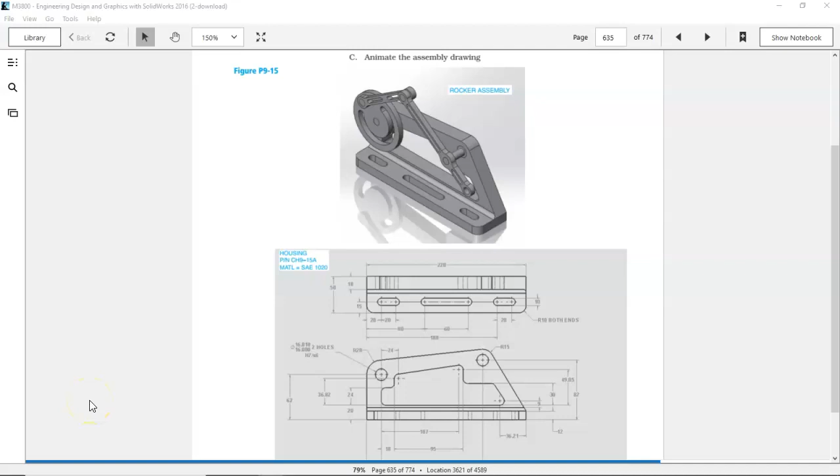This is a try it yourself exercise assignment final, and I want you to be able to go through the process in the overview. I will give you hints, but the follow along will be after the semester is over.

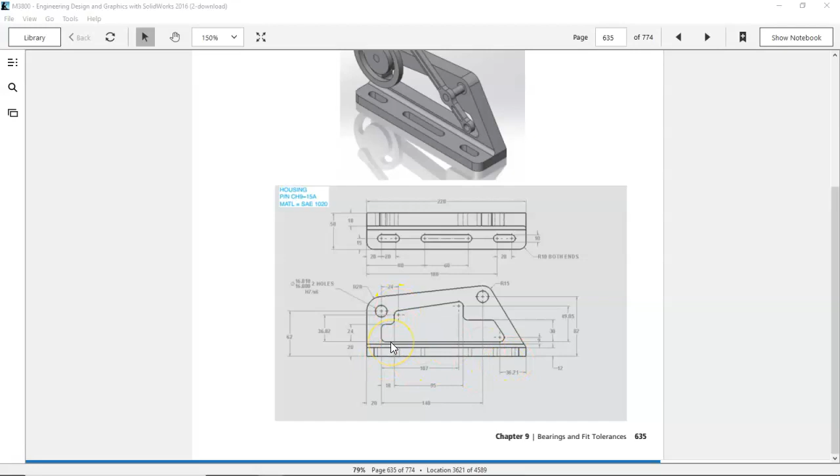So, in looking at this geometry, it really doesn't matter if you start with this lower kind of shape and then build up, or start with this back shape, front to back shape, and then build the lower. So when I look at this, let's see if we can zoom that up just a little bit.

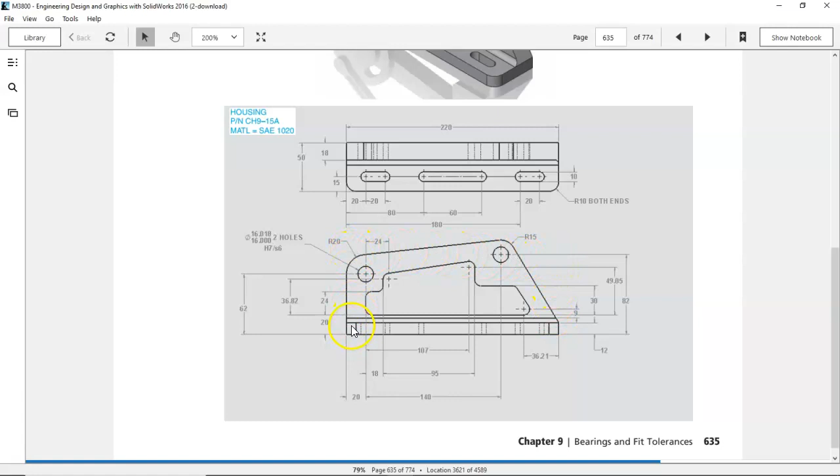When I look at this, the bottom sketches, the slots, there's nothing really too complex there. The top with the funky shape, I would probably do some construction lines, block this out, make a rectangle, do some of the construction lines.

On the next page is the geometry that they show on the interior. So, it's going to be to your advantage just to concentrate on this outside shape and worry about the interior as a second cut feature. The overall height is based on the 82 plus 15 and then getting to the 62 and making those tangent.

When you see the limit dimensions, 16.018 to 16, for a hole, the maximum material condition is going to be the smaller number. So that is the most material that's available. If we cut a little bit more, then the hole gets bigger. That's less material. So we'll take advantage of those.

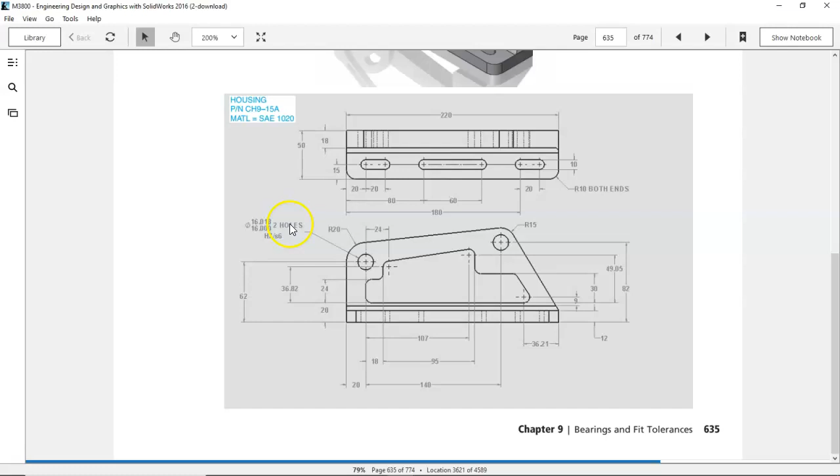And a little bit of discussion in the H7S6 is the fits for the hole and the shaft, internal and external features. So on that geometry, let's see, two holes, positions, the internal geometry, the circular.

We haven't done a circular slot, but this is a good chance to experiment with the circular slot, which is basically a center point circle that we drag out, drag through, drag the slot out, and it will generate that geometry again with the limit dimension 10 millimeters.

And the recommendation, even for going through the process and starting to think about stack ups and tolerances, because eventually those are going to become a lot more critical to our thinking and to our process: we're going to want to draw this at maximum material condition unless we talk to the machine shop, to the manufacturing engineer, to the mechanical engineer, and say, do we go to the mean? Do we go to the high side?

Typically on a CNC type situation, I don't know that I would circular interpolate that with an end mill. I would probably ream the hole, so it'd be center drill, drill, and ream. This is a steel material.

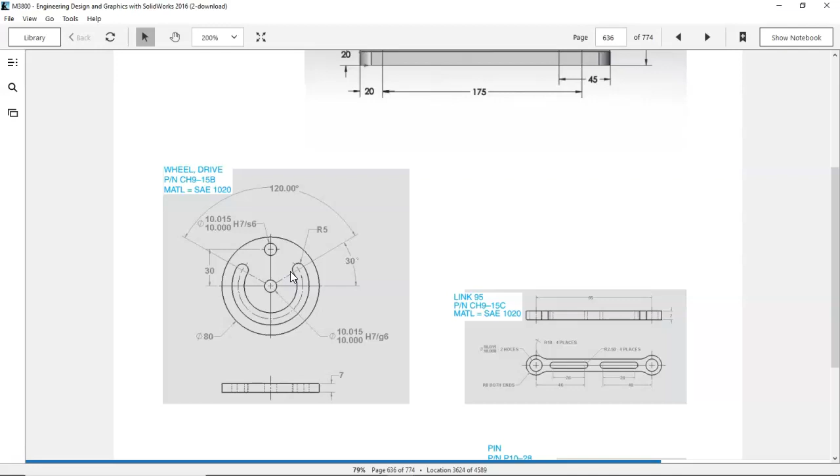We're going to look at, after the process, possibly changing some of these over to aluminum, a lighter weight alloy, and be able to utilize this as a flywheel and look at some of the mechanics using the motion functions in SolidWorks.

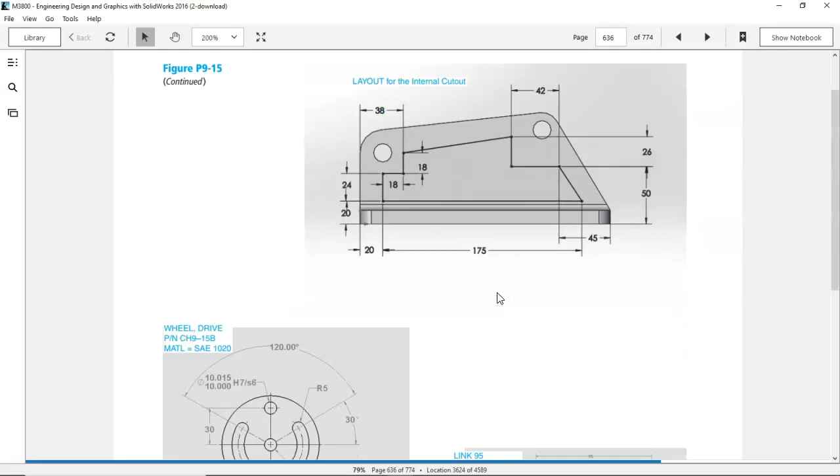Same with, well, they're calling it a link, 95 millimeter link. So a couple of slots, again, limit dimension, radiuses. We've done this geometry before, so I don't expect it to be a real challenge. You can refer back to those previous videos.

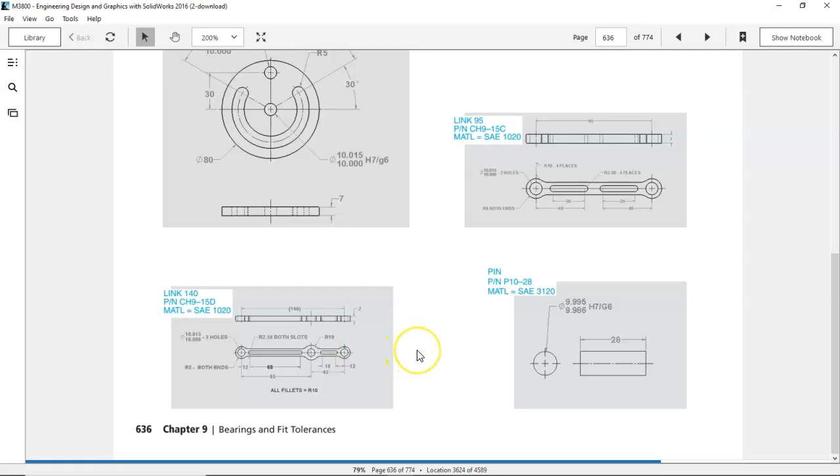There are some additional geometries that we'd want to work with. This is still just a layout sketch, going through, placing the circles, getting your geometry associated, and getting the parts built. The pin and the bushings are pretty straightforward as far as sizing.

So now we're on an external feature, and on an external feature, the maximum material condition will be the larger number, the 9.996. So 10 millimeters minus just a little bit, and you look at the stack up, 10 millimeters plus a little bit. So what we're looking for is a place where this is going to be a slip or a clearance fit and not end up in that crossover of a transitional fit or a press fit.

So these being the same types of geometry, we can use the save as. If you're comfortable with the configurations, you can go through and do the configurations. So at this point, don't worry about the H7/g6. Be able to recognize these limit maximum material conditions. And worst case, if you pick one of the numbers and put it in there, it's still going to assemble, it's still going to go. But in design review, if you have to make a justification of the sizing and the clearances, this is where it's going to become a little more critical.

So the other thing is, if we go to run a performance simulation, a Simulation Express FEA analysis on the assembly, those line to lines are a little bit easier to calculate. Telling the software that there's a gap and to recognize that gap is still in contact requires a little bit more computing power. So I start off at least line to line, and then we have other tools that we can utilize to actually work on the stack up of tolerances and critical.

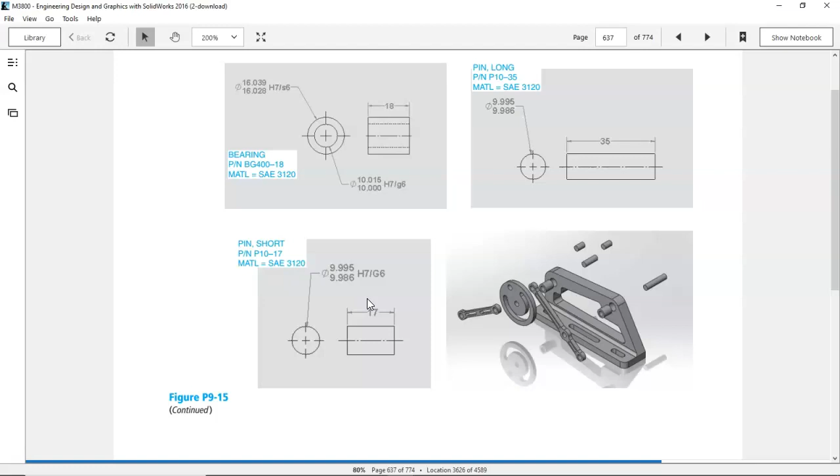So let's see, is there another page on this one, or does it jump over? So that was the end. So this is in the chapter on bearings and bushings. So there is a little bit of information. You can take a look at the McMaster website and see what a standard purchased bushing or bearing would be. And I would think that this would be a bronze. They're calling it an SAE 3120. I'm not that familiar with it, but I'm assuming that that is a steel.

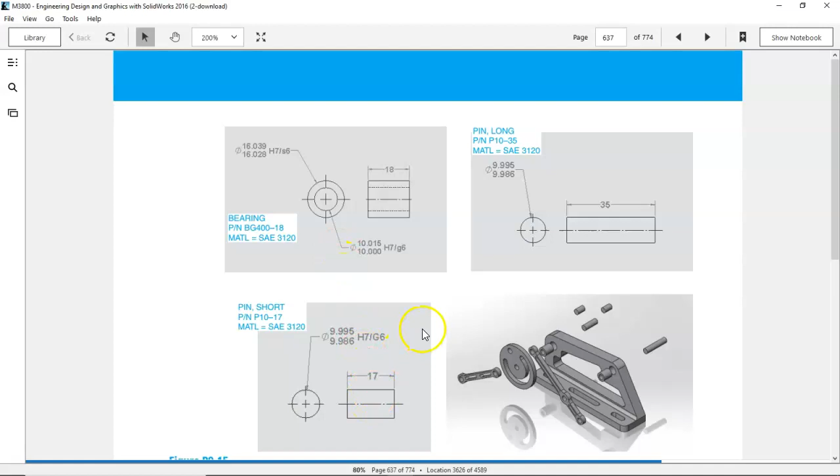In the manufacturing ease of use, I would probably look at this being an oil impregnated bronze bushing, standard off the shelf replacement parts, and then a stainless steel shaft for the pin and the long pins. So, we're going to run through the same parts, assemblies, drawings. We'll pick up the videos with the drawing and give you some direction on applying those tolerances if you want.

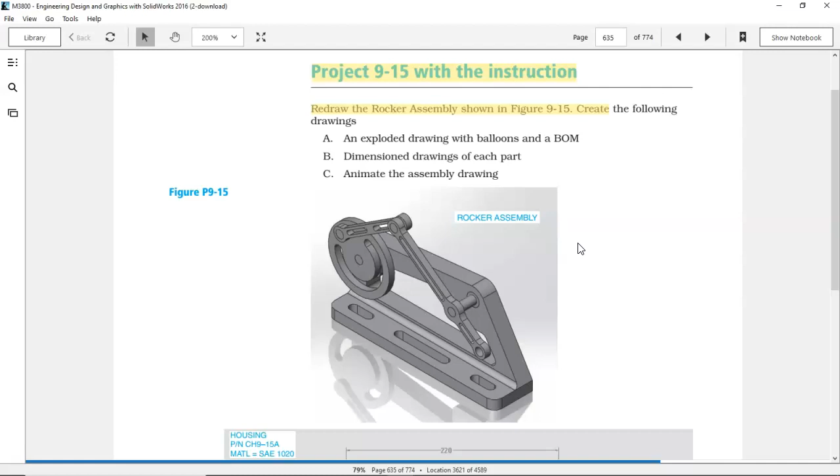As usual, I'm not looking for a perfect drawing. I want the geometry. I want you to understand the process of creating the geometry, creating the assembly, getting that into a working document in the drawing, and then as you refine the process and go through those iterations, and there will be many iterations, that spider web starts to come into view of all of these different influences and tools that we have available to us that can bring it down to that document that can be utilized to manufacture these parts.